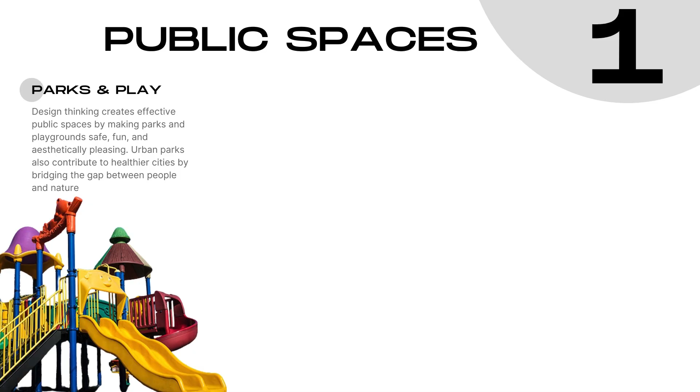Design and urban development intersect first and foremost with public space. This includes sidewalks, parks, plazas, playgrounds, and public buildings. The designs of these public spaces are crucial for them to be truly accessible, safe, and aesthetically pleasing.

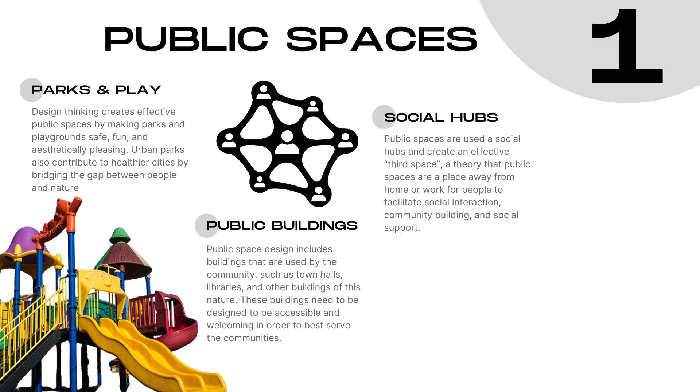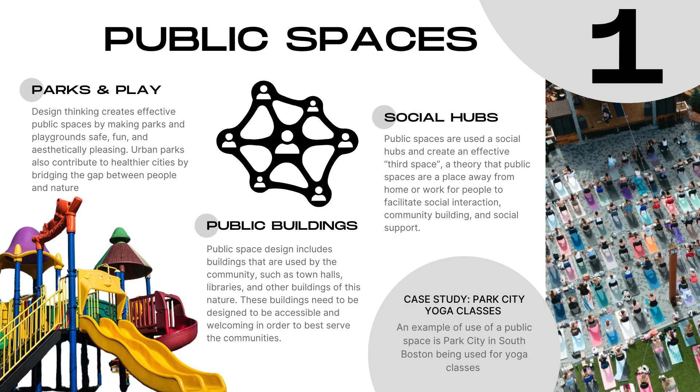Public spaces can effectively create a third space, which is a place that people can gather outside their homes or work for social interaction and community building. An example of this use of public space as a third space is people coming together for yoga classes at Park City in South Boston. Yoga instructor Sarah Mangelson talks about how important these types of gatherings are to have people come together and connect in their communities.

The design of architecture in urban development is crucial for a number of different reasons. The architectural designs in urban areas impact the spatial layout for a city. These decisions lead to the walkability of a city, the number of public spaces, the resilience of a community, and its climate regulation.

Not only is it important to understand how each building is designed, but also how it interacts with its surroundings. Another way that architectural design impacts urban development is through its style and materialistic choices. These decisions shape the identity and feelings of a community. For example, in an article by Annie Pearson, she explains how there are even different stylistic choices within one city. A relevant example is Boston, Massachusetts, has buildings with Queen Anne style, as seen on the bottom left, and others in a federal style, as seen in the bottom right. So, although different, the material choices and design reflect the history of the community.

Finally, enclosures are important for creating public green space in highly urban areas, particularly in housing communities.

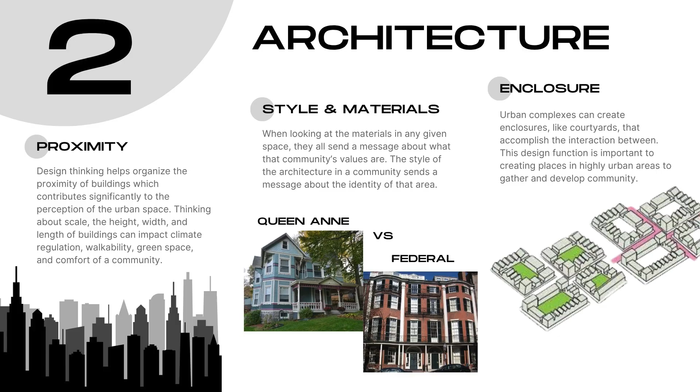The design of different transportation methods is critical for urban development. We can think about the idea of transportation in several subsections: foot traffic, cars, public transportation, and physical activity. Communities do not all have the infrastructure designed to accommodate all of these methods of transportation equally.

According to an article in Forbes, for decades, areas were developed to prioritize the automobile. The urban sprawl of people across the U.S. was driven by the automobile being accessible and infrastructure being invested in by President Eisenhower. The automobile is ingrained as a method of transportation for the American consumer, and it takes extensive urban development and transportation specialists to redesign urban areas around people instead.

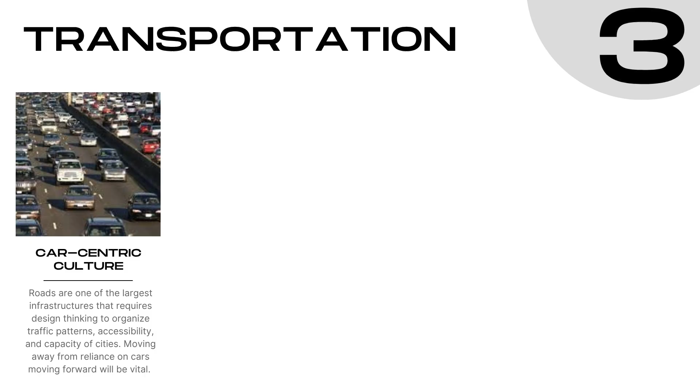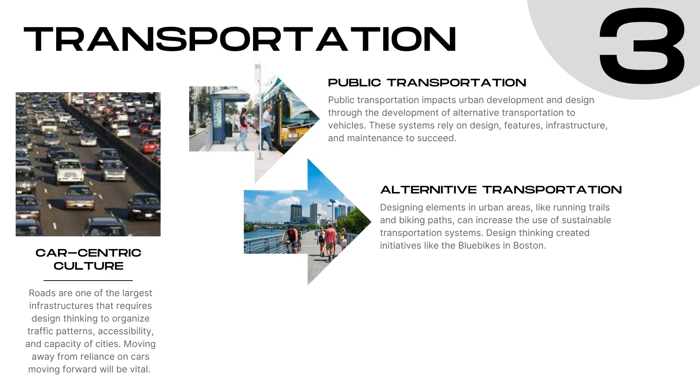This can be done through bolstering public transportation in the United States, since we have some of the weakest infrastructure for public transportation in a developed country. Adding another form of transportation like electric bikes and scooters with infrastructure like safe bike lanes can help move away from the car-centric transportation in urban areas as well. Continuing to keep sidewalks and footpaths clean and accessible can encourage walking.

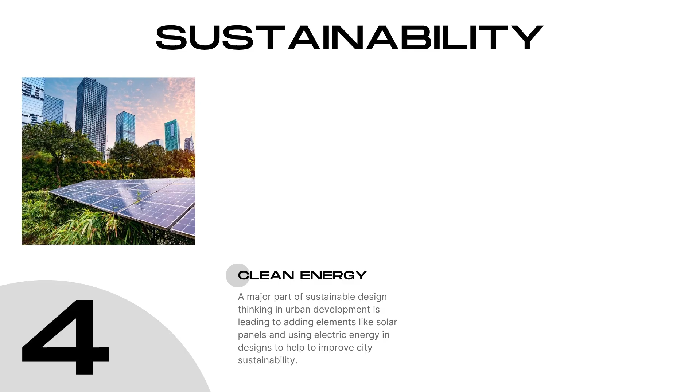Design thinking impacts sustainability in urban development. Thinking about how we can integrate sustainability practices like renewable energy sources and using clean energy alternatives can make cities more sustainable. Another crucial part of sustainability in urban areas is the integration of the living and non-living world. The term biophilia, or the greening of cities, is essential to livability because we currently have more concrete than biomass in the world. Designing parks, plants, and buildings to have more greenery can combat this issue.

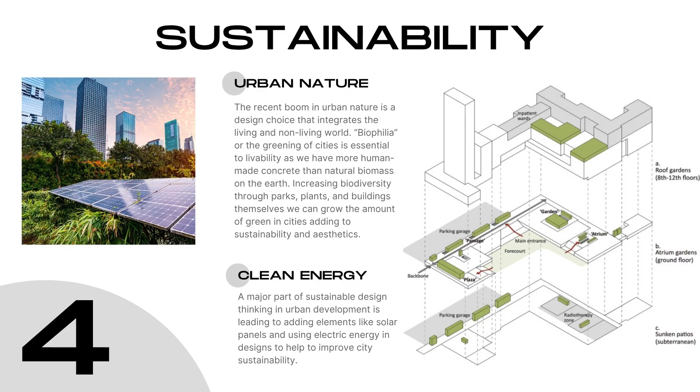Here you can see the different design options like roof gardens, atriums, and sunken patios as options in urban spaces. A more specific case study in 2016, we see Colombia's second largest city use marginal spaces in urban areas like walls, fringes, and verges. They were able to plant over 880,000 trees and 2.5 million small plants to reduce pollution and decrease the temperature by 8 degrees Fahrenheit. Not only did this combat environmental issues of overheating and pollution, but it also increased people's well-being and created new jobs.

Health and well-being is of the utmost importance in urban areas. Looking forward, around 70% of the population will be living in cities in 2050. With this migration into urban areas, there are health concerns as diseases like cardiovascular disease, cancer, respiratory disease, and diabetes are the leading causes of death globally.

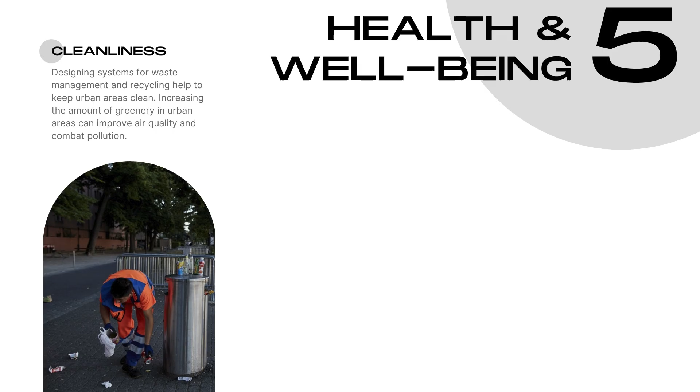Design thinking can help us mitigate risks by developing cities to promote healthier living as the default. This is seen through designing systems to keep cities clean, like recycling and other waste management systems. Designing cities to be walkable and have safe cycling paths to promote movement, which is seen to have decreased obesity levels in areas where this exists.

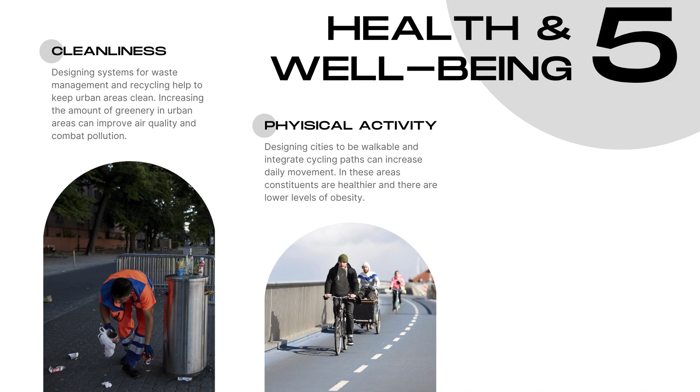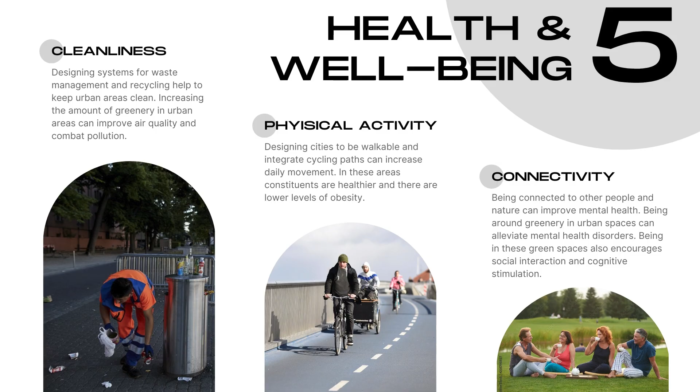Designing spaces with a focus on nature not only improves air quality, but further promotes physical activity, reduces stress, and enables social interactions in these areas. Being around nature is also proven to alleviate mental health disorders, as well as having higher levels of social interaction in these spaces. Technology has changed the way in which we gather information, optimize systems, and share information.

The Internet of Things has been designed into urban areas through cameras, sensors, and gadgets, and gives us insight into systems that we had never had before. Technology is allowing designers to use AI and VR to help visualize projects. Other optimized systems like autonomous vehicles, electric scooters, and ride-sharing platforms lead to interconnected and smarter cities.

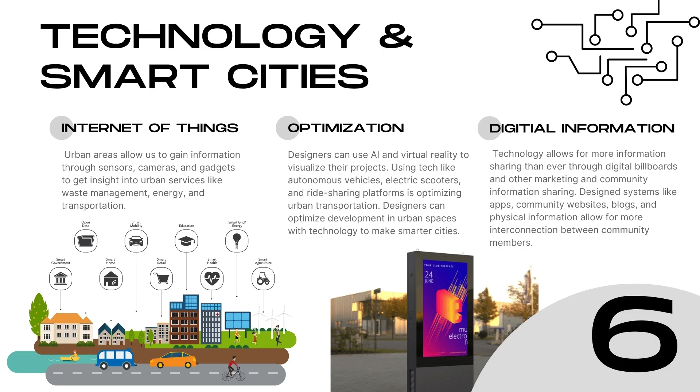Information is shared more rapidly than ever through technologies in urban areas. We are seeing an uptick in digital billboards, kiosks, and apps that share information and increase this connectivity.

Equity and inclusion in urban development come from the ability to design spaces that consider all groups of people. A major hindrance to urban areas is their inequities, or the fact that based on an individual's physical or mental abilities, they have less access in an urban space. For an urban area to be equitable for all people, it needs to follow universal design practices that create access for all ages and abilities.

Individuals should feel comfortable and confident in navigating urban areas to be a part of the community engagements and offerings. A case study from Oradell, New Jersey highlights that poor sidewalk conditions impacted the quality of life for disabled individuals in the community. This led to an initiative called Project Sidewalk, which was a digital tool to help map and audit the conditions of sidewalks in the community.

This is just one example that draws attention to the importance of making equitable changes in public spaces to ensure that it is accessible for all moving forward, and how we can take action before systemic change is made.

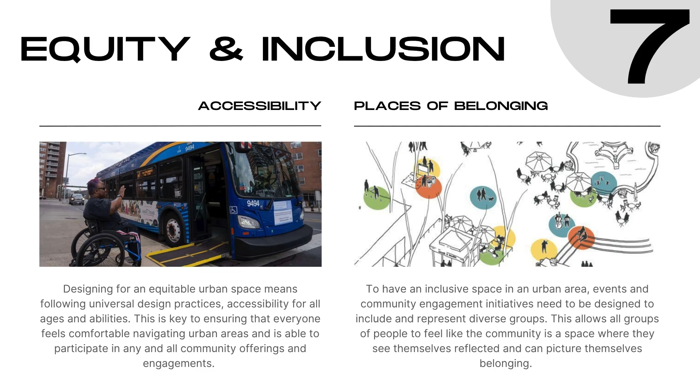On a similar note, urban areas should be designed to be inclusive. Individuals in these areas should feel as though they are reflected in the spaces around them. This means having diverse groups of people represented in events and community engagement initiatives. This helps people feel as though they are in a place of belonging and improves their overall happiness and well-being.

He created this mural on a 20-story building with portraits of the residents within the building. It is a piece that symbolizes the unity of different people coming together. Murals, sculptures, and other pieces can do this as well.

Another urban design aspect is the integration of traditions and heritage. These considerations can make urban spaces feel more welcoming to diverse groups. Design features like multilingual signage, sensory-friendly areas, and culturally relevant programming will allow residents to feel more included in their communities and bring their traditions and voice to those spaces.

Consider these global examples of preserved cultural identity amidst development. Japan stands as a paragon in this regard. Its careful preservation of historical districts amid modern development exemplifies respect for cultural heritage while embracing contemporary life.

Similarly, in New Zealand, urban landscapes incorporate indigenous Maori designs while celebrating and keeping alive the rich traditions of its native people. These examples illustrate urban spaces can indeed be melting pots where history, culture, and modernity coexist and enrich each other.